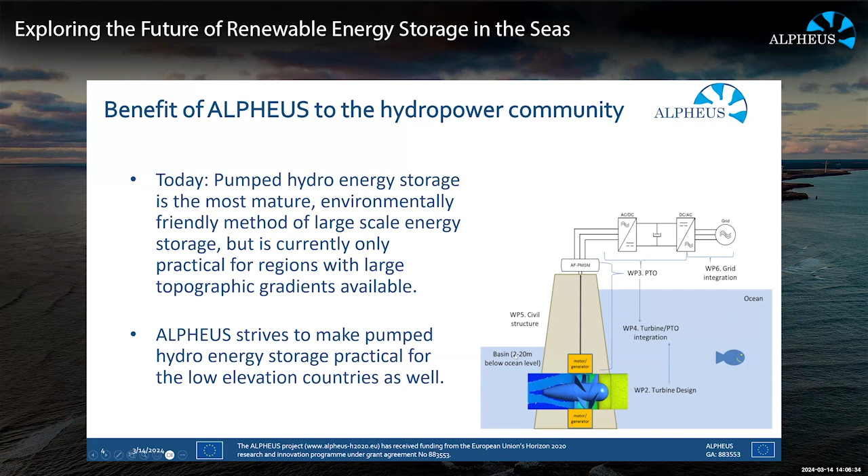Our project has identified feasible sites for this technology in the North Sea. As you can see here, sites in the Dutch North Sea, co-located with planned wind farms, in the English Channel, shallow regions of the English Channel near France, the German North Sea, also the Belgian and Danish North Sea coasts, not shown on this slide.

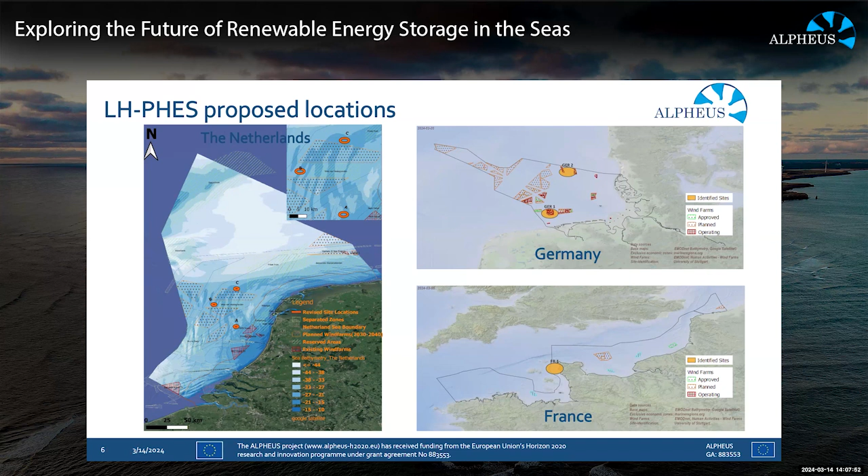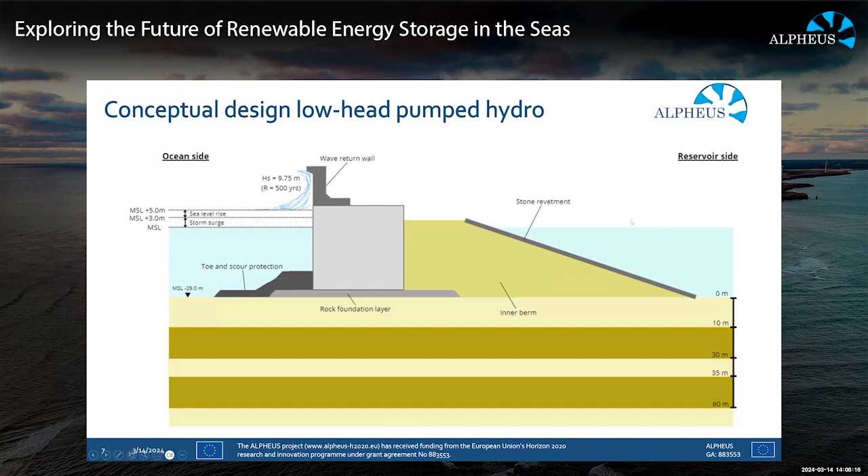The general civil technology consists of a concrete caisson dam, this on the left being the sea, buttressed by an earthen berm, on the right being the lagoon, with a powerhouse section itself consisting of modular caissons that are prefabricated and floated in, with power conduits and reversible pump turbines and machine halls inside them.

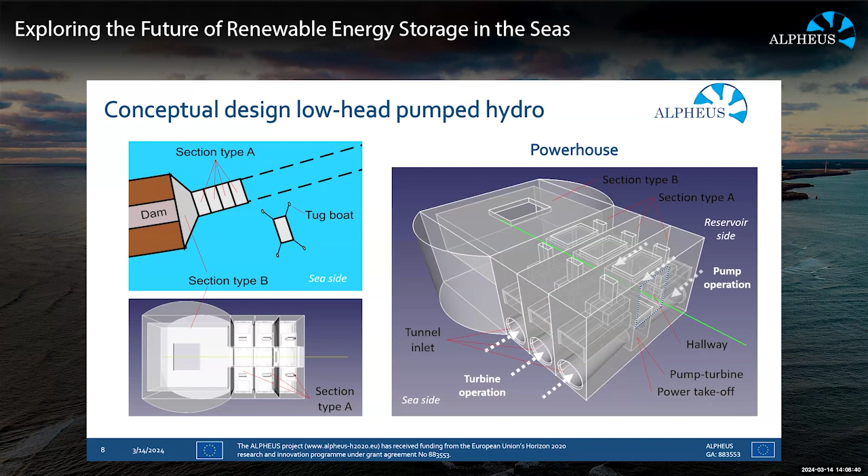But what's really unique about this is that the presence of two rotors allows, during pump mode, axial flow to be generated without much swirl in the flow. So energy is not wasted on generating swirl in the flow. It remains axial. The first prop generates swirl. The second prop reduces the swirl and turns it into axial flow. And similarly, during turbine mode, swirl that is induced by the first prop is used by the second prop to generate power. So it's a highly efficient technology in both pump and turbine modes.

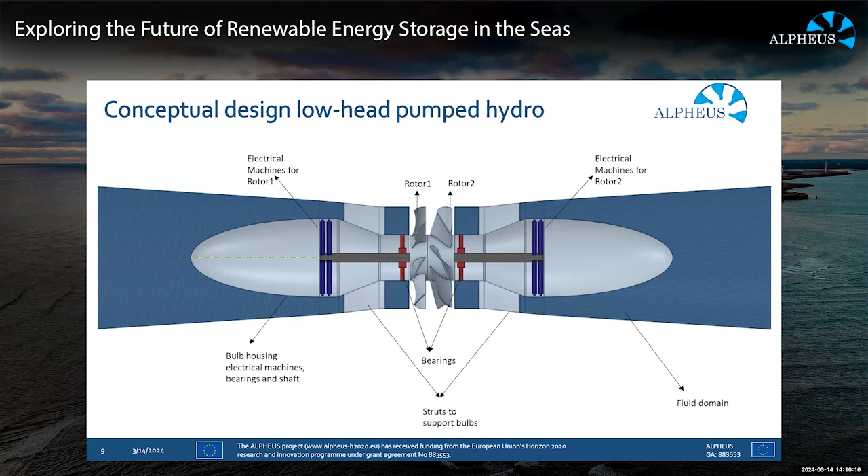So how are we evaluating this? We're at model scale. We are measuring the performance of this device in the laboratory. And here is a video by TU Braunschweig showing how we do that. So as discussed before, we have pump and turbine modes. And the way that we are evaluating this in the laboratory is that we have an elevated tank representing the sea and a lower tank representing the inner basin. And we can flow water from the upper tank to the lower tank to measure performance as a turbine.

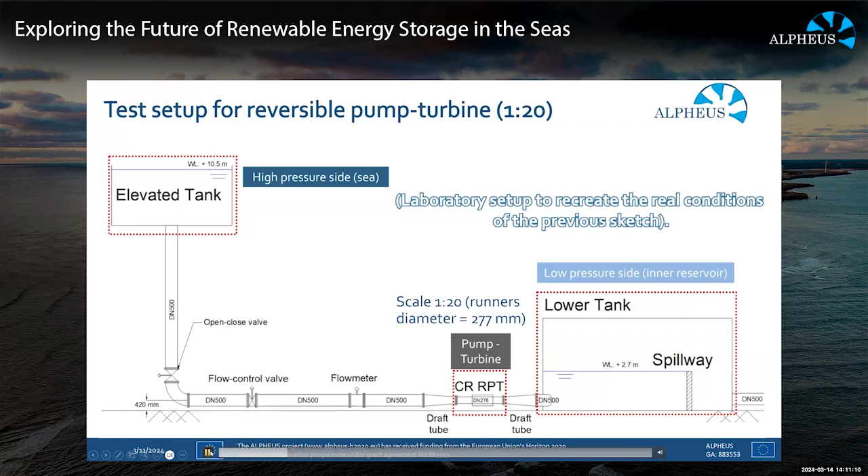Let me go back a sec. And pump water from the lower tank back to the upper tank to measure performance as a pump. This shows the elevated tank, penstocks coming down to the lower tank, a butterfly valve used for throttling the flow and control, transformer, flow measurement, motor controllers, and our actual turbine attached to a lower tank.

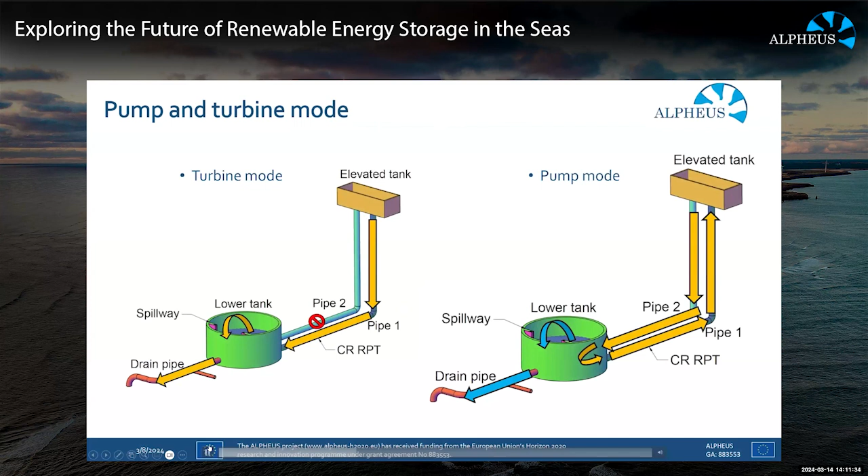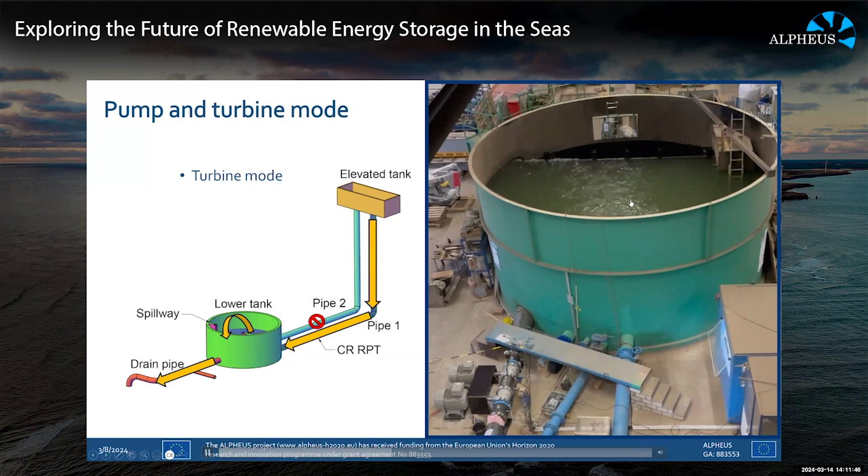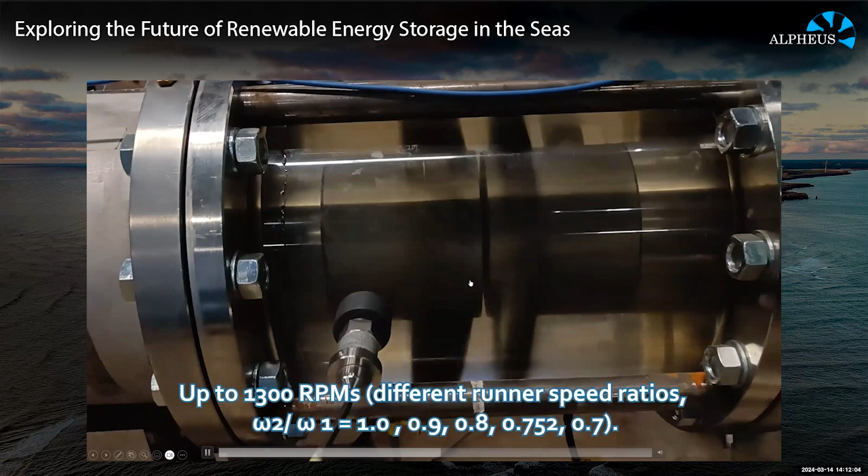This shows the way our water flows in both modes. Here in turbine mode is water upwelling from the device, shown here, into the lower tank. Here you can see the counter-rotating prop spinning through this acrylic test section, driving two motor generators. Each of the props can spin at different speeds, controlled separately. Flowing into the lower tank, our model generates up to 400 liters a second. Once again, this is model scale, not prototype scale.

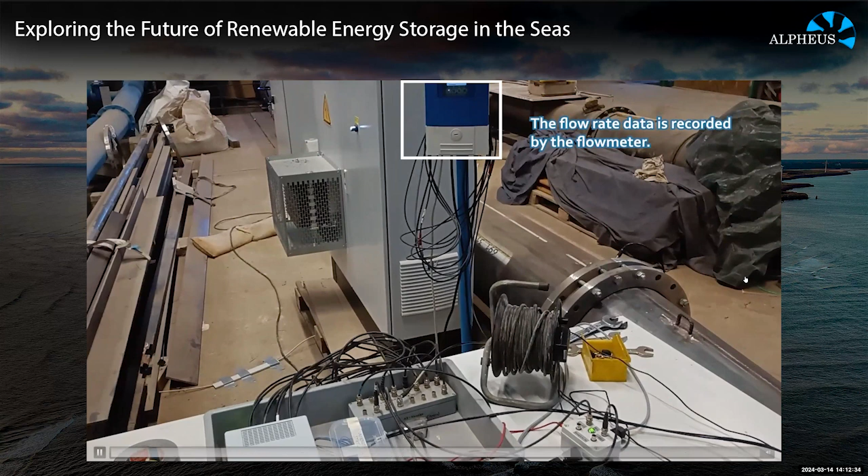We make many measurements in the laboratory, and again, we are running up to 8 meters of head, a realistic head, in the laboratory. This is our data acquisition system. And experiments show in turbine mode model scale efficiencies up to 82%.

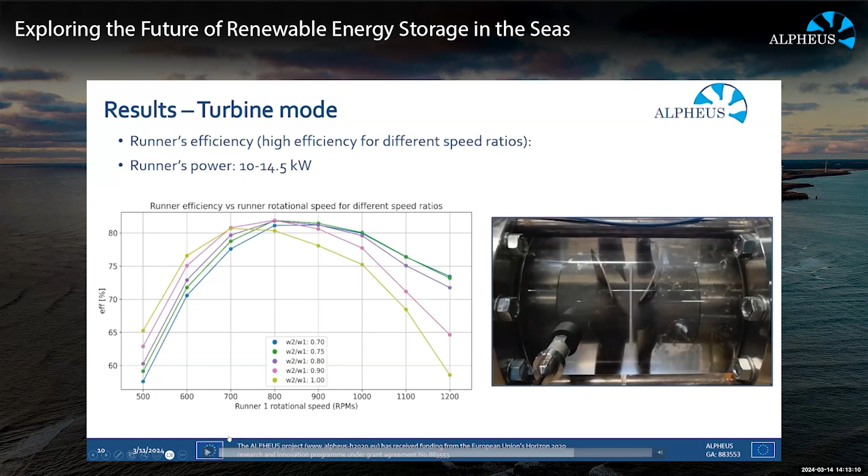This video here is showing the propellers being pushed by the flow when the lower tank is filling. These are not being operated by motors. You do see cavitation. This is not set at a low enough elevation to prevent that. At prototype scale, this is designed to be set at a low enough elevation to prevent cavitation. In pump mode, we're seeing efficiencies up to 92%. Once again, at model scale.

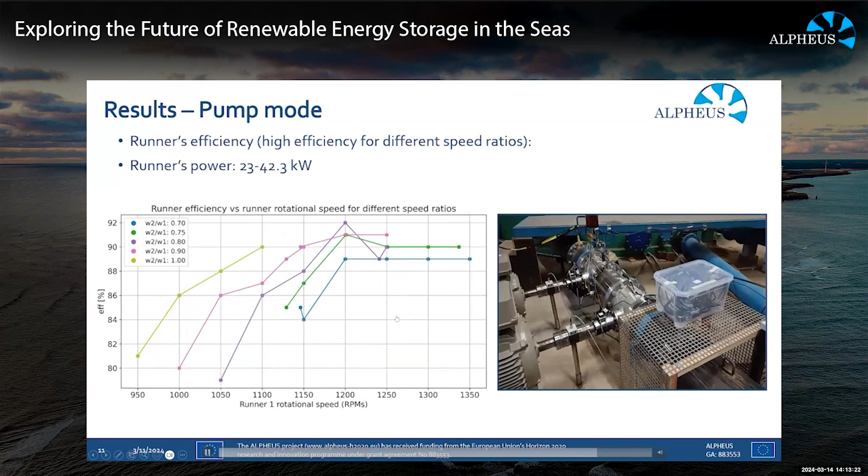So here you see the motors driving the pump flow. And that shows our mechanical device. Now I will introduce our electrical device. Oh, wrong video, I'm sorry.

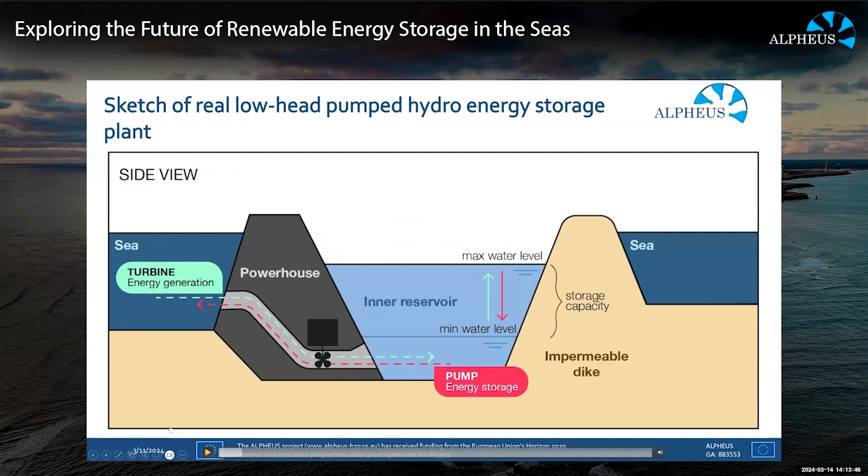I need to ask, can you hear the audio to this? Super. Stuart? Sorry? Sehr gut, super. Good, thank you.

Jeremy, if there is audio that goes with this video, we cannot hear it. You cannot hear this? You cannot hear the audio. We cannot. We can see it. Okay, yeah, so I guess Zoom does not support that. So in which case I can narrate instead. Mm-hmm.

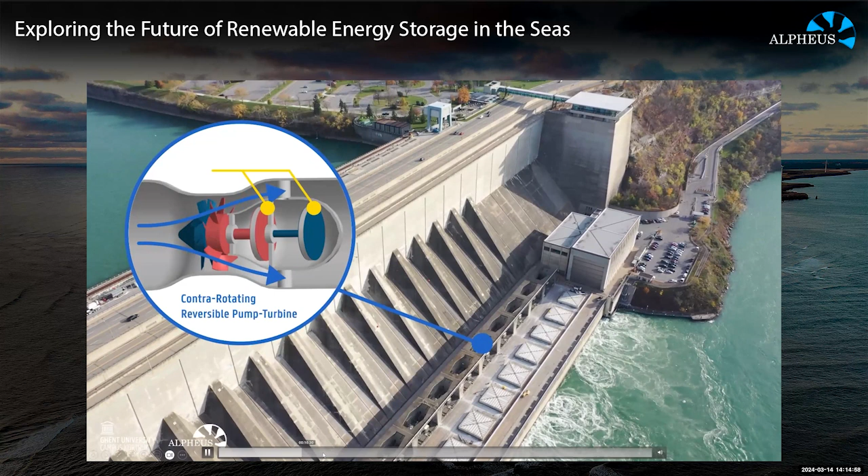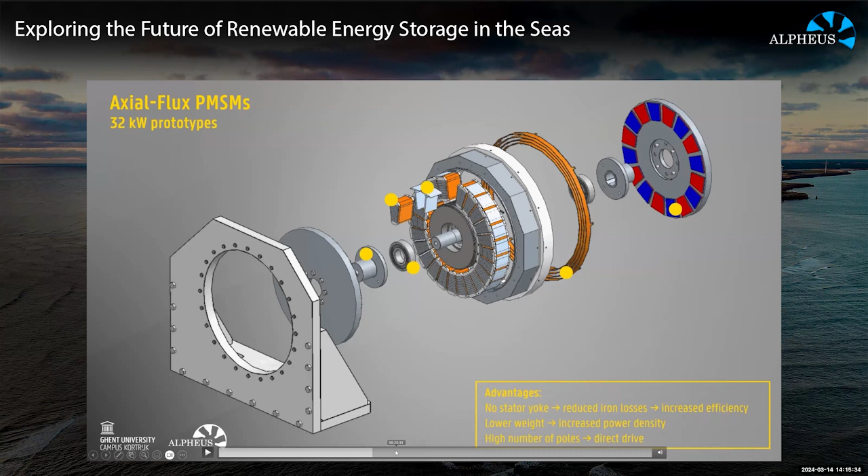So let's see, I'll move down the video. This shows these machines running in the laboratory in Ghent. Oops, I'm sorry. So the electrical machines, once again at model scale, have efficiencies of about 95%. And they are currently being driven by and driving induction motors.

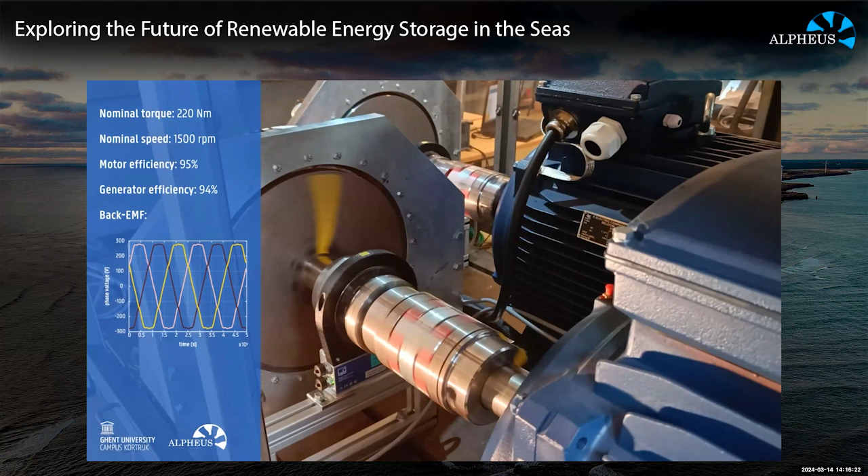I'm sorry the audio did not work out. And let me continue then.

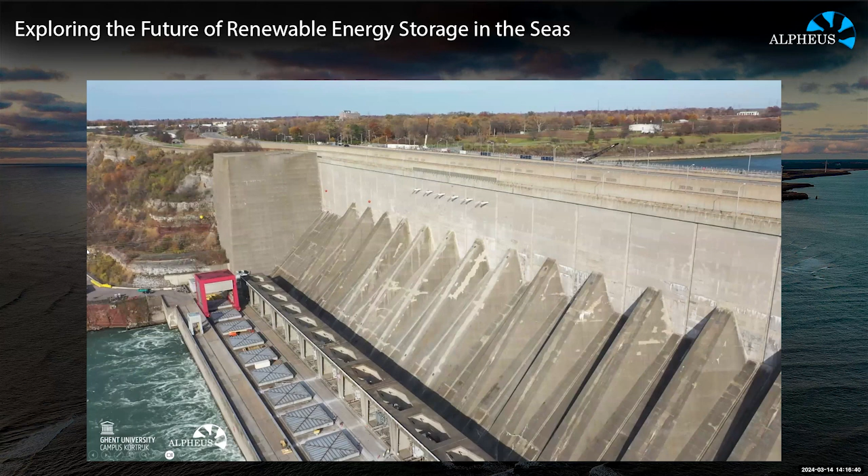So that introduced our turbine and electrical machine technologies developed by the project. Designs existing at prototype scale and being tested in the laboratory now at model scale, but against realistic heads up to 10 meters.

So our analysis of the technologies in the project, primarily the civil structures, has shown costs. So for a project of 2 gigawatt capacity, operating for 10 hours, so 20 gigawatt hours of storage, with a lifetime assuming 100 years, a discount rate of 5%, and an assumed round trip efficiency of 70%, though we get slightly higher than that at prototype scale, assuming all losses.

We have calculated O&M costs of €117 million a year, a capex of 5.5 billion euros, and levelized cost of storage approximately 190 to 200 euros per megawatt hour.

What we see here in this chart is that levelized cost of storage is on the high end of conventional or mountain pumped hydro storage. And that's not surprising because we need to do a lot more work to generate the head available by building a large dam. But it's not much more than most conventional pumped hydro storage projects. We also see our levelized cost of storage is on the low end of lithium-ion batteries and hydrogen.

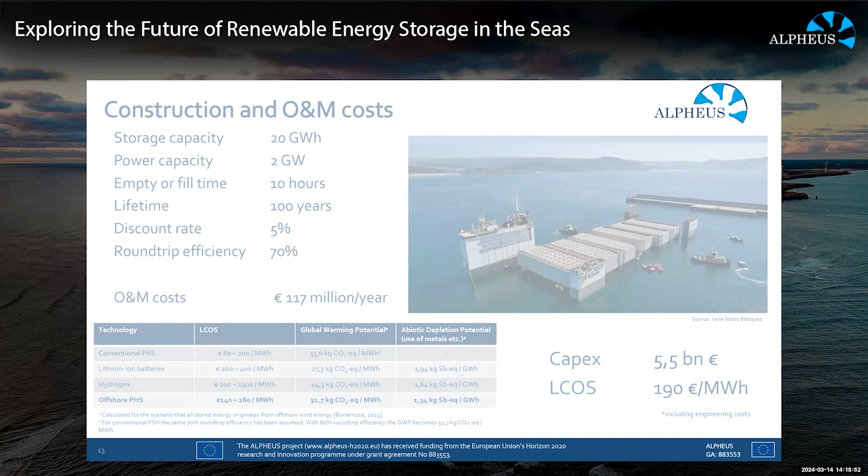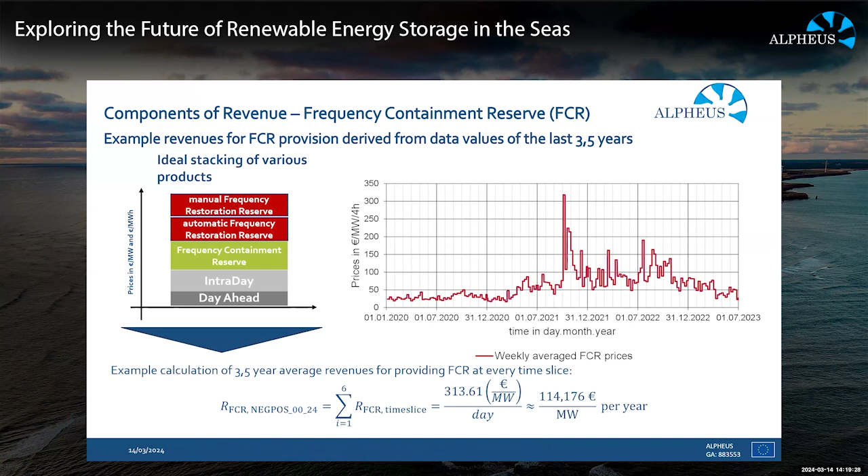So our conclusions are that, one, the North Sea has plentiful sites for low-head offshore pumped hydro storage. Civil technologies are already well developed and mature. Dredging and offshore companies around the North Sea already know how to build with caissons and embankments. Electromechanical technologies have been fully developed and are being tested at model scale. And at prototype scale, designs show efficiencies up to 80% round trip.

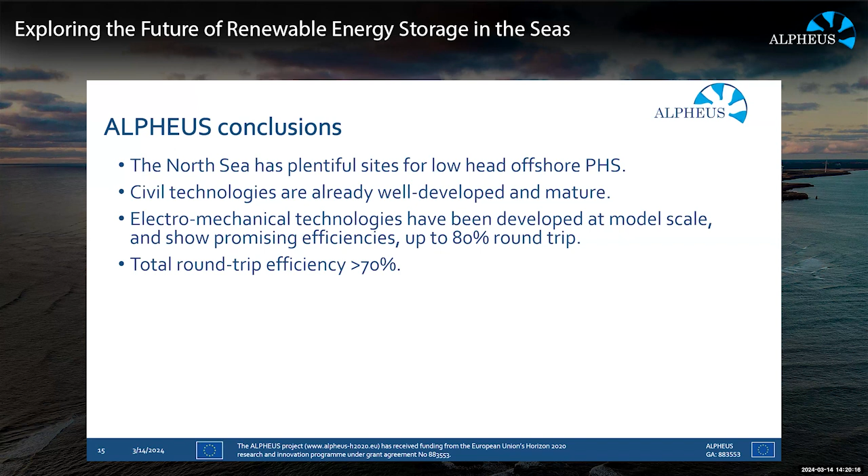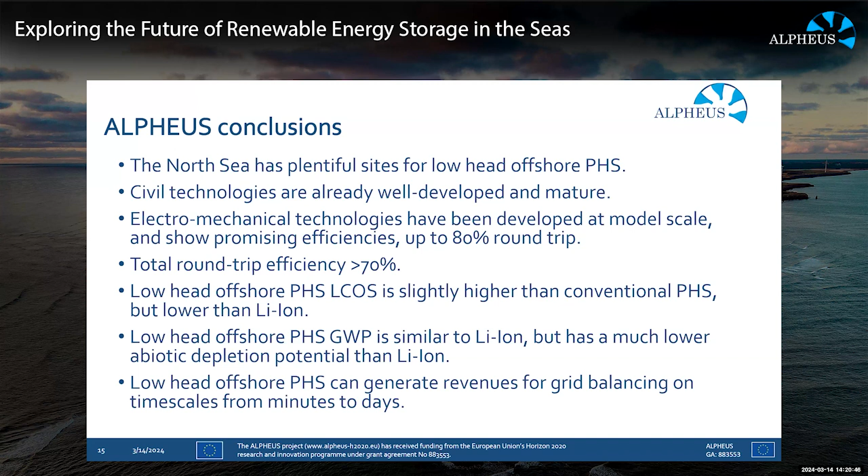Total round trip efficiency, which includes civil structure losses, valve losses, and also trash rack and fish screen losses, is still greater than 70%. Our levelized cost of storage is at the high end of conventional pumped hydro storage, but the low end of lithium ion. Our abiotic depletion potential is much lower than that of lithium ion, and global warming potential similar to lithium ion. And we can generate revenues for grid balancing on timescales from minutes to days.